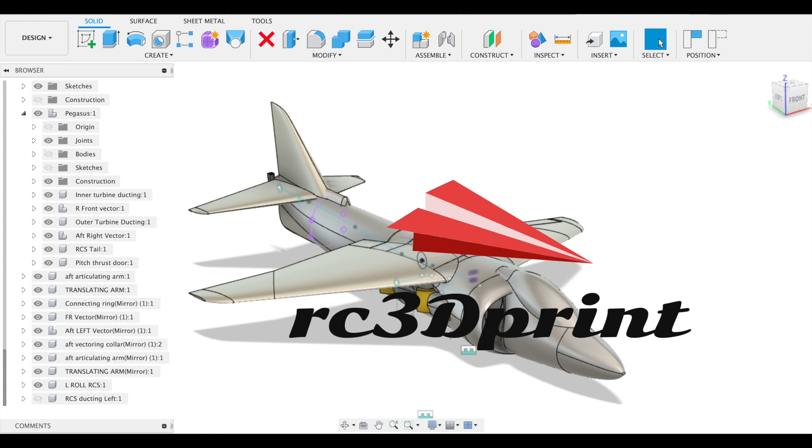What's up? So a couple of weeks ago I posted some pictures on Instagram of this Harrier that I started building, and I thought I'd do a video about it. It just started because I was waiting for parts for a smaller airplane, and it was more to do with just could I make it work in Fusion rather than having any intention of building it. But there was so much interest that I thought we got to try and do this.

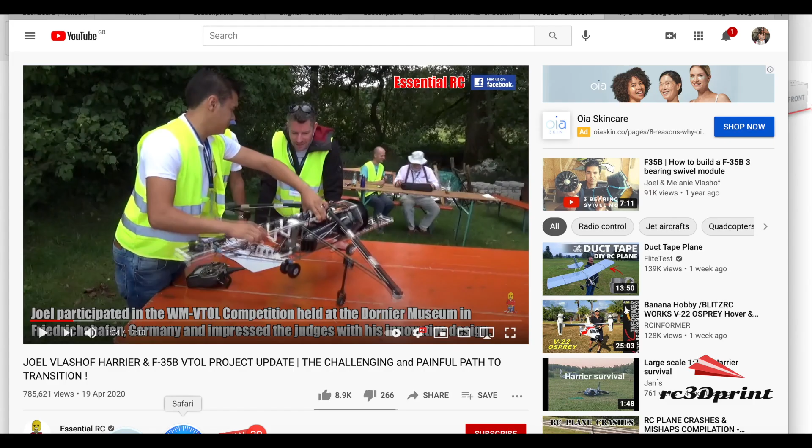So the plan is for this 3D printed Harrier. It's about 1 meter wingspan, and it kind of pushed me to make it after people told me about this guy, Joel Vlashof, and his Harrier. And here you can see, it's a bit loud. And here you can see his 3D printed internals. And then he went on to fly that. You can see it here, it's flying really well. And then I think he built, there we go, this glass fibre sort of plug that then the rest of it goes into.

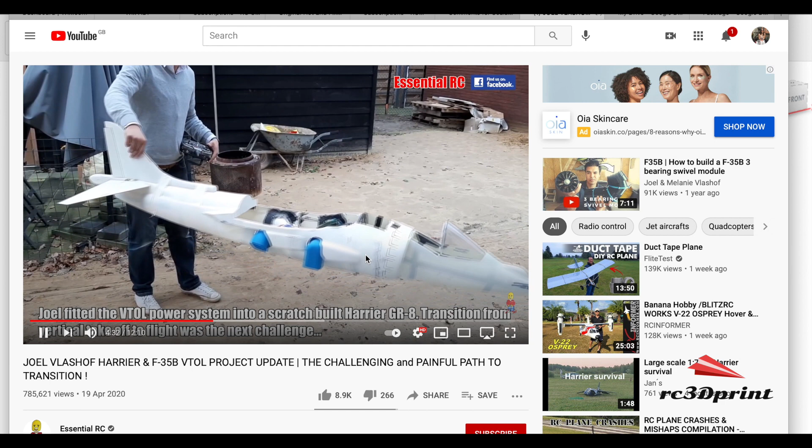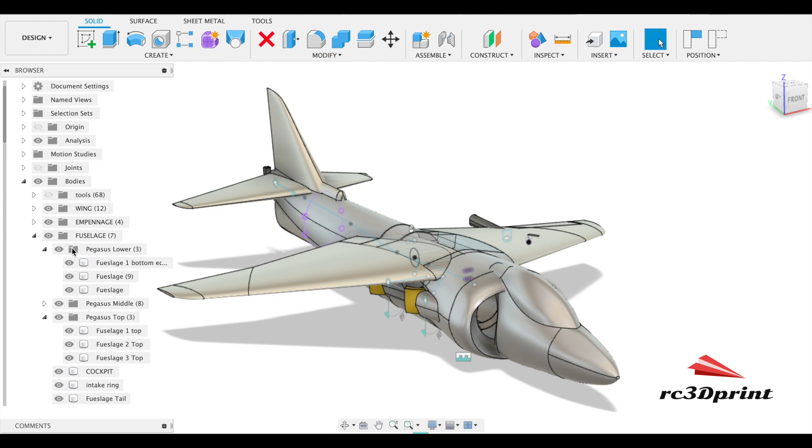Now, I don't want to do that. I want to do 3D printed. And the other thing I don't want to do is, if you see here, he uses an EDF on the front and the back to help control the pitch and the hover. And I don't want to do that. So where I've ended up is with this sort of idea here. Let's just get rid of all the bodies to start with. There you are. That's what I started with. This is this sort of Pegasus idea. It's similar to Joel's I've subsequently seen.

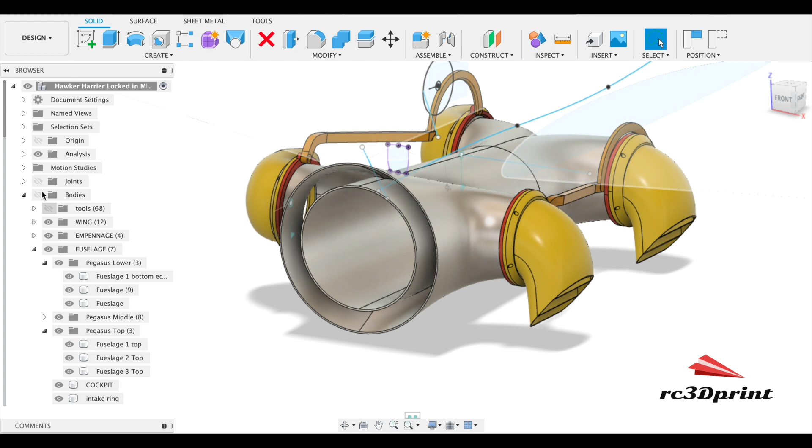I've gone with using the air on the outside of the EDF for the forward vectors and on the inside for the rear vectors. And don't forget the middle here is blocked out by the motor. And then we take some bleed air off as well from the top for our reaction control systems. But what I didn't want to do is print all this ducting. I wanted that to be integral to the body of the Harrier. So where I have ended up, let's bring all this back and then we'll break it down from there.

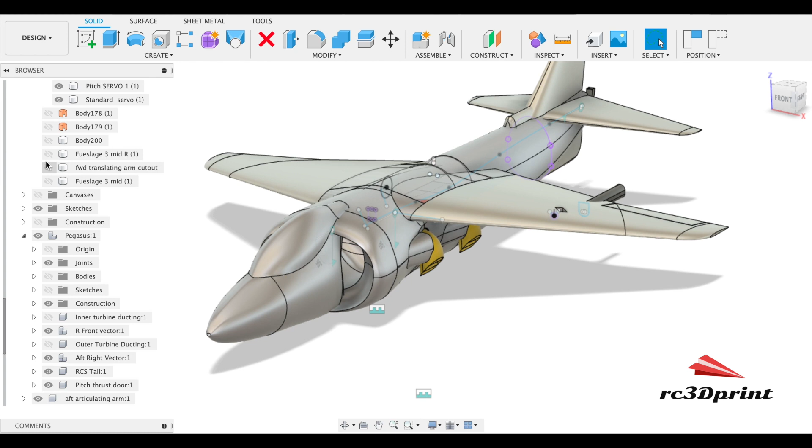So let's get rid of, hold on. That one, and that one. All right. So if we now break it down, I did this a minute ago. This is the second time I've recorded it, and it was so much slicker.

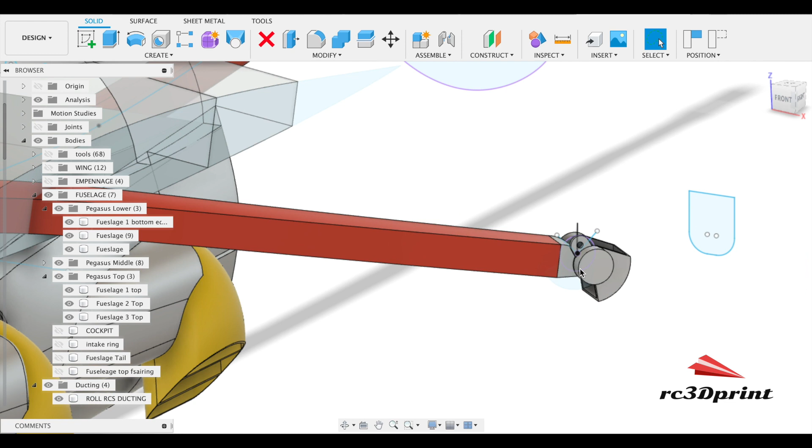Right, so here we go. We've got these red bits. They're going to be ducting, and this would be the roll duct with a valve here. And when the valve is closed, it diverts the air upwards. When the valve's open, the air can continue overboard. So that's how we're going to get roll. And there's obviously going to be one each side.

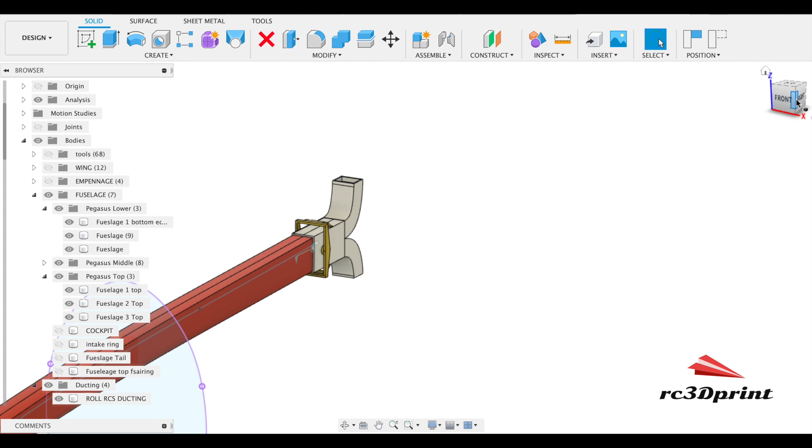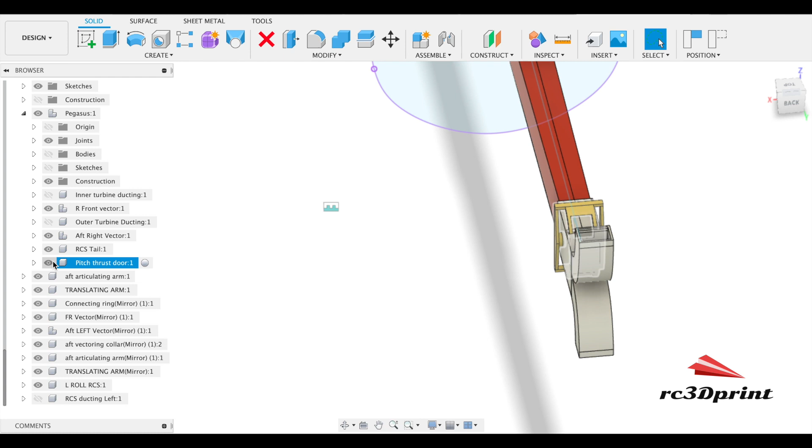And then for pitch, I kind of thought, wonder if we could do it just with a reaction valve in the tail, because it's the longest moment arm, and with this kind of dual-ended valve, we can either supply air down, which is obviously preferable to give us a nose down pitch, or up, and servo. Oh man, like I said, I did this earlier and I was able to find everything straight away. There we go. So there's your valve that will move.

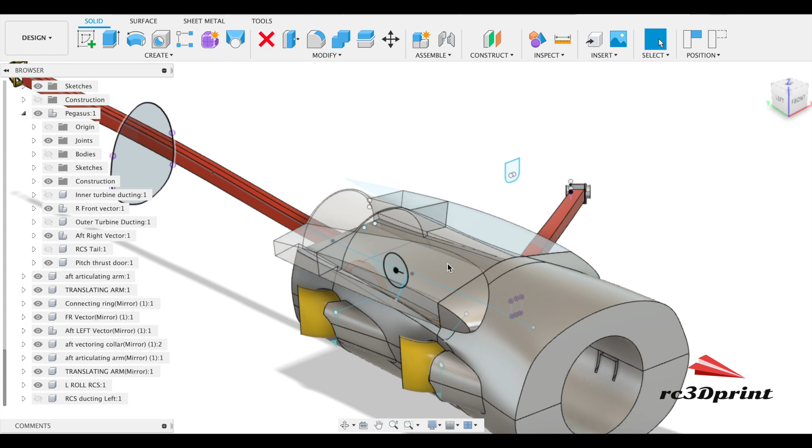As I said earlier, I wanted the ducting and all that to be integral, so these would be cut out of the solid body of the 3D printed aircraft, and the same goes for our kind of Pegasus motor. So I broke it down into 3 levels at the moment. So if we get rid of the top and the middle, you can see the bottom level. These would be printed in parts. So you've got one part here, that then goes onto this part here. That might end up being split into 2 actually. No, it won't, it'll be okay, because we want to be able to print.

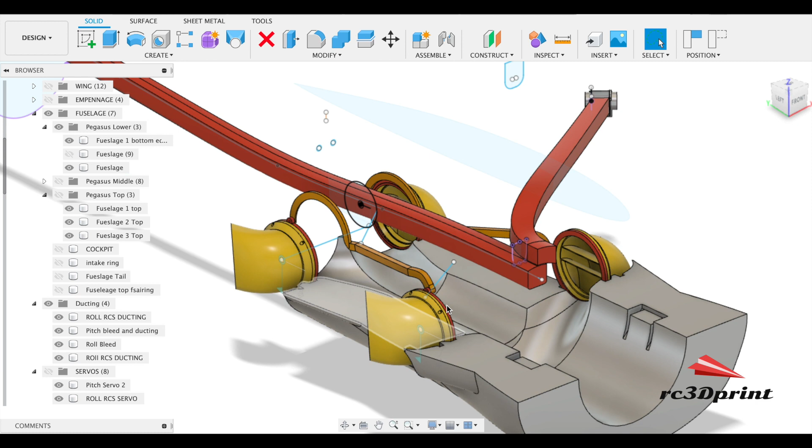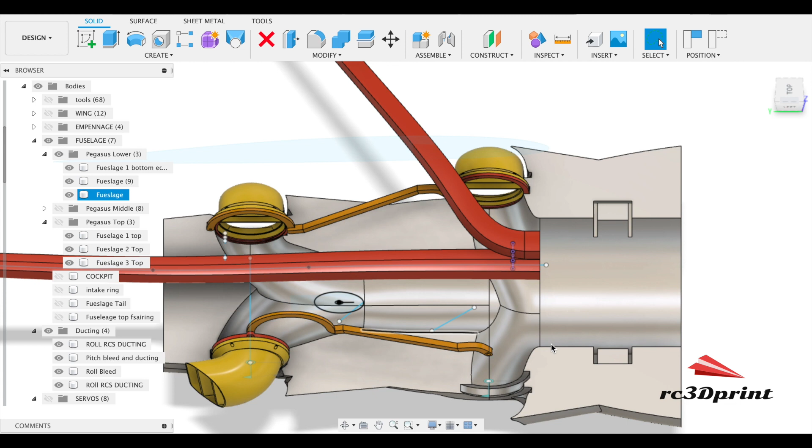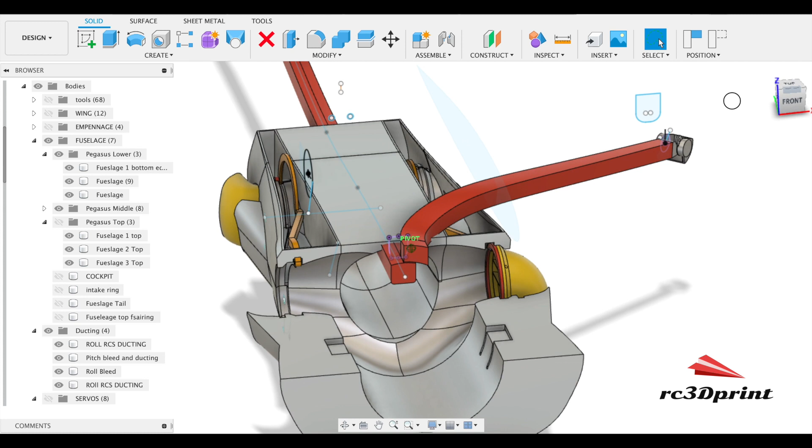Obviously you'll see that there's grooves in it for the thrust vectors to be able to turn in. Let's get back up here. And then the aft part, so they would go together, and that provides the ducting. So the EDF would sit here, and you then get the ducts. And then if we bring the middle back, you can see the middle. And the middle section completes the ducting for the aft vectors, and there's space for these. It also, when you put it in, is what kind of holds the vectors in place, and they'll then turn.

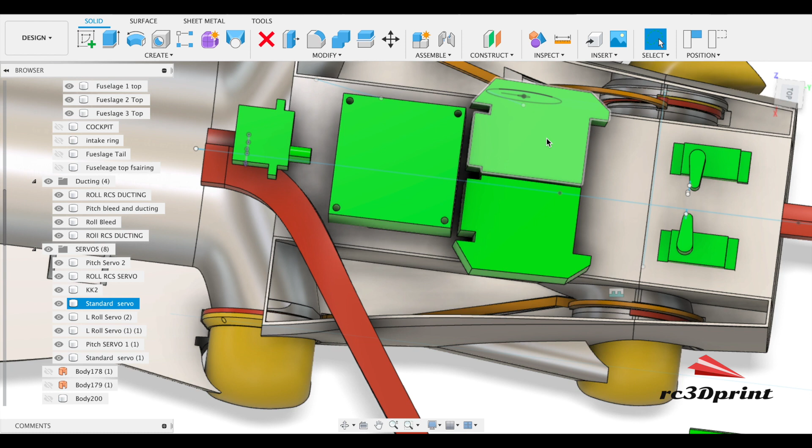And I've cut out room for translating sleeves. On this top surface here is where the servos go. So that'll be the KK2 board, 2 servos here to control the translating arms, 2 pitch servos here, 1 for the elevator, 1 for the RCS valve, and this will be the aileron RCS, and then we've got flaps and ailerons. I think that's the minimum number that I can realistically do it, space being the premium up here.

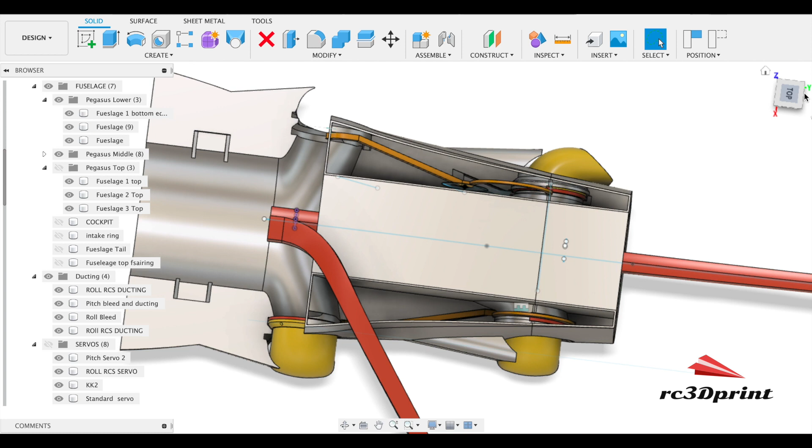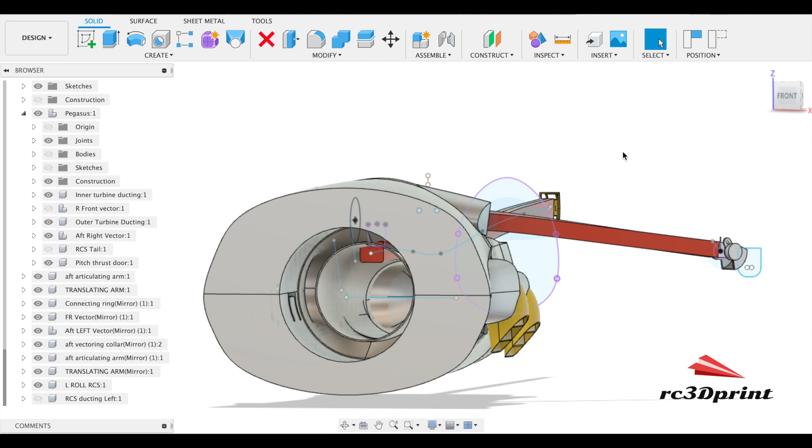Let's get rid of the servos for a second. So that was the middle layer, and then the top layer there completes the housing for the servos, and the top of this one. Now don't forget as well, there will be, is it that? Yeah, that'll be part of it as well, but it'll be built in, and so that provides the air for the front, goes around the outside, the back goes down the middle, and the bleeds will be bled off from up here, so these will extend in. And that's all off a 90mm fan.

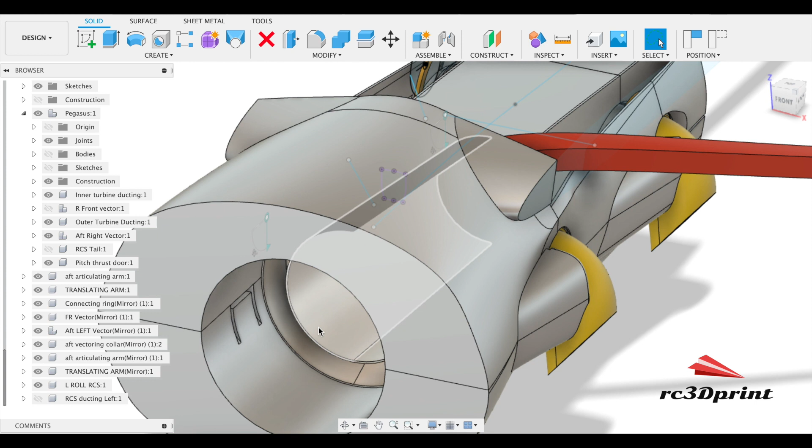Now, there are so many issues we're going to have with this design, whether or not it's feasibly possible, I don't even know. But I'm going to learn loads, and it should be fun.